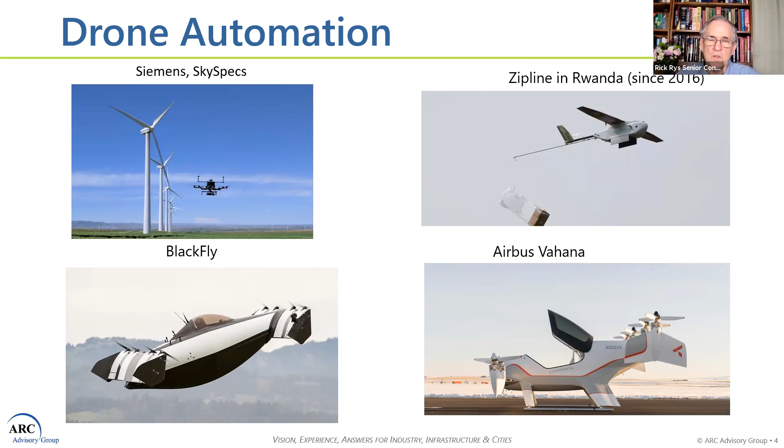But in any event, here's just a few examples of some drones. Siemens has been working with SkySpecs to inspect wind turbines. Some of these other drones are more in line, from Airbus and BlackFly, and you certainly see that the airline industry, Boeing included, have drones coming up. Some of those drones are not just for delivering packages, they're delivering people.

I'm not going to go too long here, but in terms of automation, there's enormous automation in the flight aspects. The engines are automated, the motors and batteries, multiple batteries in series and separate parallel entities, so that any one failure of a motor and battery still keeps the craft able to fly or stay in the air. Obviously there are issues of stability, as in windy conditions.

There's the whole issue of navigation on prearranged plans. The ability to communicate with your drone and what happens with loss of signal is a huge aspect. There's plenty of stuff going on with ADS-B and other communication expertise, so that a drone knows where it is and knows what other drones or aircraft are in the area.

Then there's a whole level of automation software just on mission logistics, data collection, and data management. I'm sure that some of our speakers today are going to talk about all of those problems.

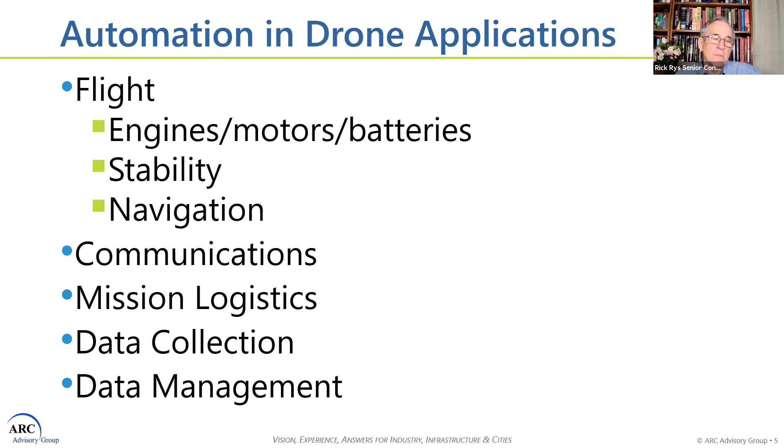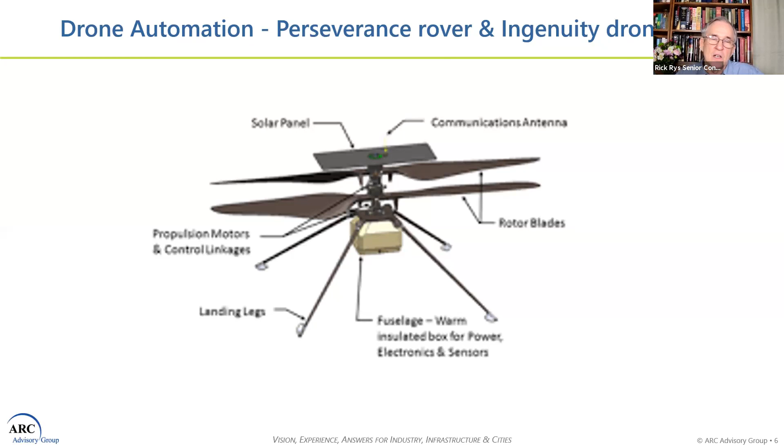I did want to mention that at 3:55 today, just a short while ago, the Perseverance rover mission should have landed on Mars and will deliver this very interesting drone, which will be an experimental drone running in the very thin atmosphere of Mars. If you really wanted to see automation at its best, this is completely autonomous with a 12-minute speed-of-light delay between here and Mars. It's pretty hard to control this with a joystick.

Just very quickly, ARC has covered some of the markets. We did a study a year or so ago on the use of drones in the construction industry. We know that they're very big in agriculture. Utility inspection is a small but growing area. Pipelines, mining, and real estate are also growing areas.

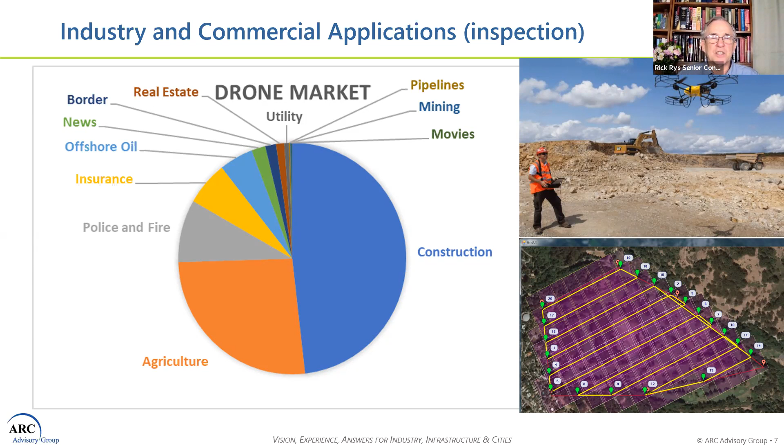And if you compare this to drones for delivery, these markets could become pretty small. Drones for delivery will be a huge thing in the future. Part of that is imagining just how far in the future and how long it will take. But when you look at how fast drones have evolved and changed and found new applications in the last 10 years, just imagine what it's going to be in another 10 or 20 years.

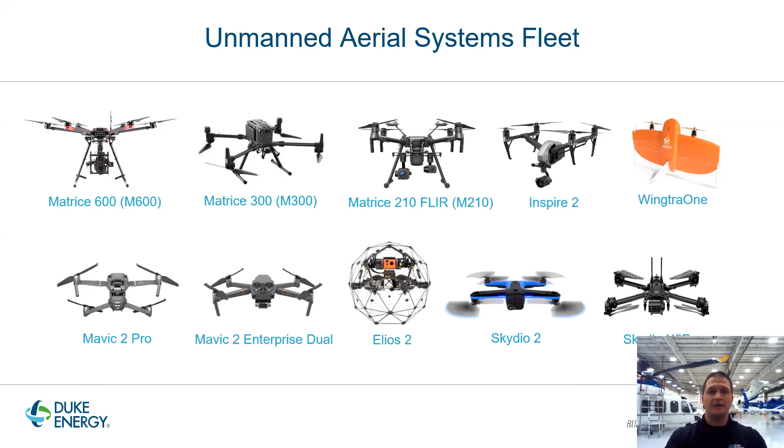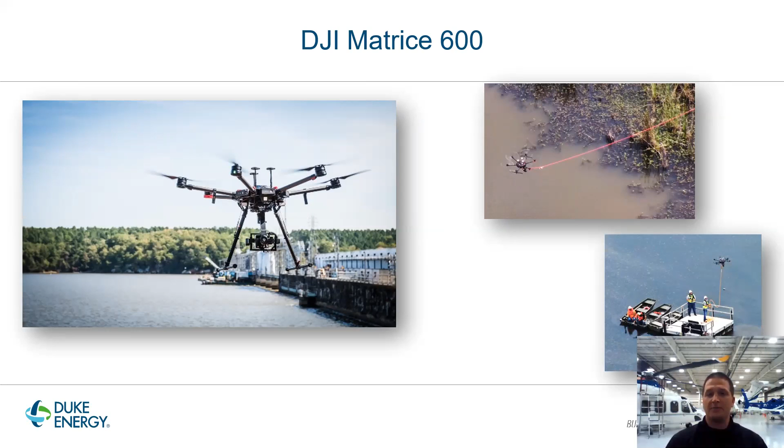Shown on the screen here is the DJI Matrice 600, or M600 for short. It's certainly our heavy lift drone here in our fleet, and we've used it for some pretty unique missions. On the left, you'll see a PhaseOne camera system, which we'll talk about shortly. On the right, you see more of a payload capacity piece of this drone, where we're pulling string across a body of water to support a construction effort. We've also used this drone for water sampling and other various load handling capabilities.

As previously mentioned, the M600 with the PhaseOne 100 megapixel camera is one of our more standard use cases. It's a great sensor setup that allows us the ability to shoot in high resolution while maintaining safe standoff distances conducive to flying a mission safely. In the middle of the screen is a picture of the PhaseOne iXM-100. Recently, we've been using this system to capture imagery that we then turn into a 3D model. What this allows us to do is have an inspector, who otherwise would be in the field climbing scaffolding doing some of the more dangerous inspection work, do this inspection now from the safety of their home.

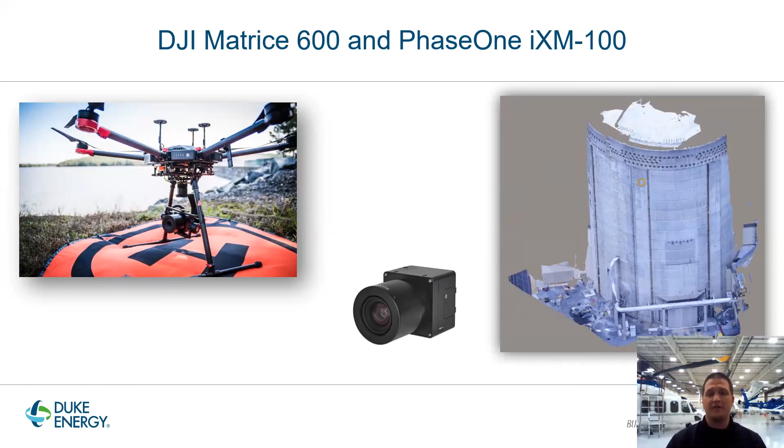Another sensor package that we have for this drone is some new processing that we're trying out - post-processed kinematic, or PPK. We use that system for orthomosaic mapping, and the PPK system is a form of GPS correction that allows for highly accurate positioning to be established in the imagery.

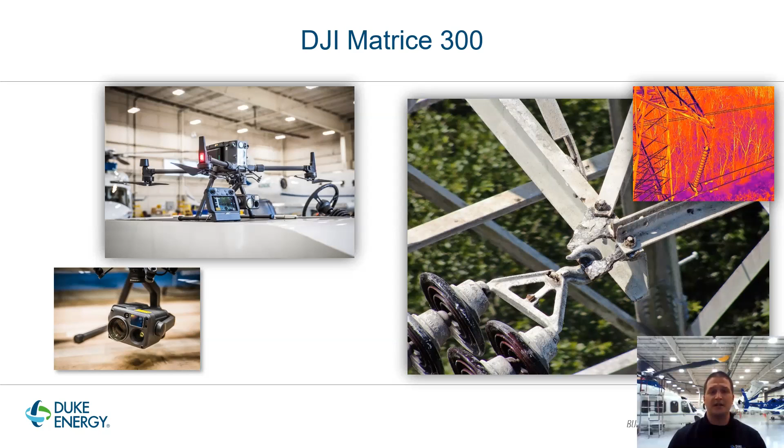It has a very nice sensor package, a 42 megapixel camera, and again, along with that PPK setup, provides a very accurate map. We use it on our solar sites and generating stations, and also on our ash basins, which are anywhere from 200 to 1,000 acres typically, and we're seeing very good success with this drone being able to cover that amount of area.

And then we have our little workhorse here, the Mavic 2 Pro. It's the jack of all trades here at Duke Energy, and for many aviators, you can liken it to the Cessna 150 or 152 of the drone world. It serves as a primary trainer, the drone of choice that we deploy out into the business units for employees who don't fly for a living.

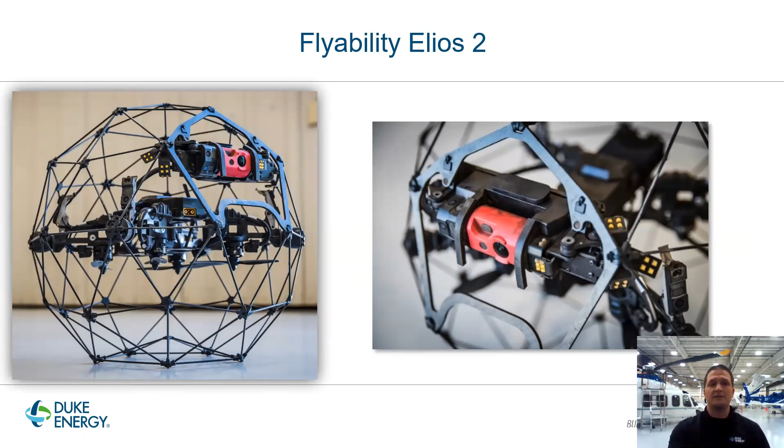EHS being environmental health and safety from a sourcing standpoint, and that goes for sourcing drones, sourcing software that we use for our systems, as well as our vendor network. IT and cybersecurity, obviously a buzzword in the UAS space. Security and risk management, a whole host of departments that are tied to the UAS organization as a whole.

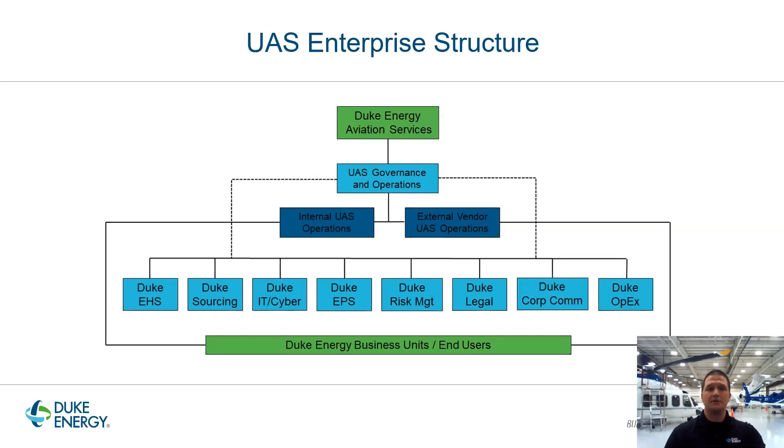From a storage standpoint, we've faced several challenges. A hard drive is the first thing that comes to mind for a transfer to an end user. It's pretty cut and dry, handing over the data physically, but at any scale quickly becomes obsolete.

So we turn to the OneDrive, a Microsoft cloud-based system that we utilize here for the entire enterprise. And after about 6 to 8 months of utilizing the OneDrive for storing data, transferring it to the end user, we ran into some volume issues therein and had to look for a new solution.

Most recently, we've been using a SharePoint site. It's internal to Duke, a SharePoint site that's kind of put a Band-Aid on the solution for now. It's maybe 25 times the size of the OneDrive, but certainly within a year or two's time, we'll be looking for a more permanent solution.

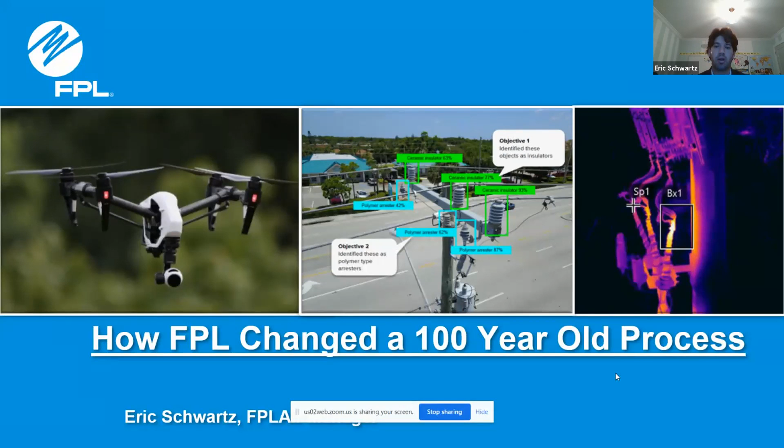Well, thank you guys. As Rick said, my name is Eric Schwartz, and I manage the FPL Air program. Today we're going to talk about how FPL is using drones to change what we call a 100-year-old process. This goes into not just drones, but really diving into the side of Six Sigma quality control and really proving out the business case on how drones are more useful, more accurate, and more precise than a human driving or walking, doing an assessment down a line.

High level, FPL is owned by a parent company called NextEra Energy in Florida. FPL is also part of Gulf Power, which encompasses more than half of the state of Florida. NextEra Energy is our unregulated utility that operates our wind and solar fleet in over 42 states and 5 provinces now in Canada, I believe. On the high level in Florida, we operate in over 35 counties with 9,000 employees and over 75,000 miles of power lines within the state of Florida alone.

To go back to why we're using drones, from an overhead perspective you've got these 5 bullets here: Florida is one of the lightning capitals of the world. You have a subtropic environment—I'll brag, it's 80, 83 degrees today—very hot and humid, and bamboo, palm trees and vegetation grow very quickly. And then you've got hurricanes; this past year we had 5 that made landfall in the state of Florida.

We're also a peninsula, so you have a lot of salt spray that deals with a lot of electrical issues, from lights flickering on and off to faults and failures. And then also the grid—high level infrastructure like Miami and areas that are highly populated and rely on a lot of electricity.

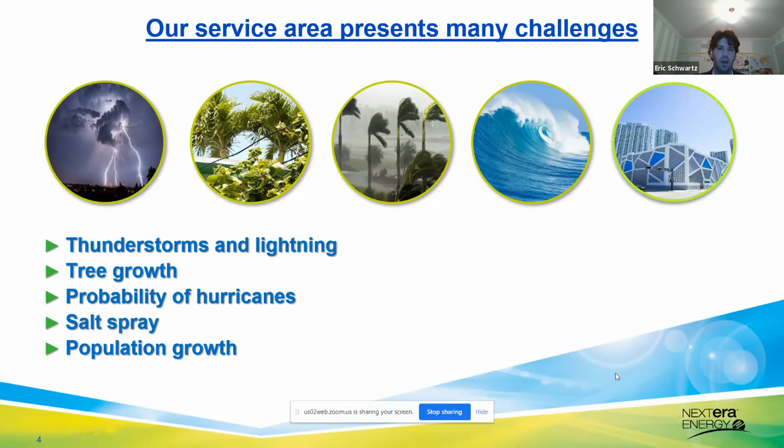So going back to why are we doing this? Why are we using drones, and why are we trying to continue to improve? It comes back to the idea of what we've been doing for the past 100 years. FPL will be 100 years old since 1925, so in 2025 it'll be our 100-year anniversary.

When you look at the assessment, it started out with mules and horse buggy carriages, walking, and now of course walking and driving. And you look at the overhead equipment, it's 35, 55, and some with transmission, 175 feet up in the air. You are really only seeing at least a quarter to half of the actual equipment, because the other half is above you or it's on the other side of the property if you're on a rear of infrastructure and so forth.

On top of it, you're relying on humans and trying to use cameras or binoculars or phones to take pictures of the damage and assessment. So we kind of look at this as the current approach is manual, inefficient, and inconsistent. When you look at this, it comes down to improving visibility, expediting damage analysis, mitigating risk, reduction of cost, and ultimately increase of customer satisfaction.

Our timeline goes back to 2012 when myself and a few coworkers started to use drones as a hobby for Florida Power and Light. It migrated into 2015 with the first 333s for those of you that have been around this long. And then it goes into Part 107, which has really changed the way that companies like ourselves, Duke and FPL and so forth, have been able to really operate at a much leaner and easier business model.

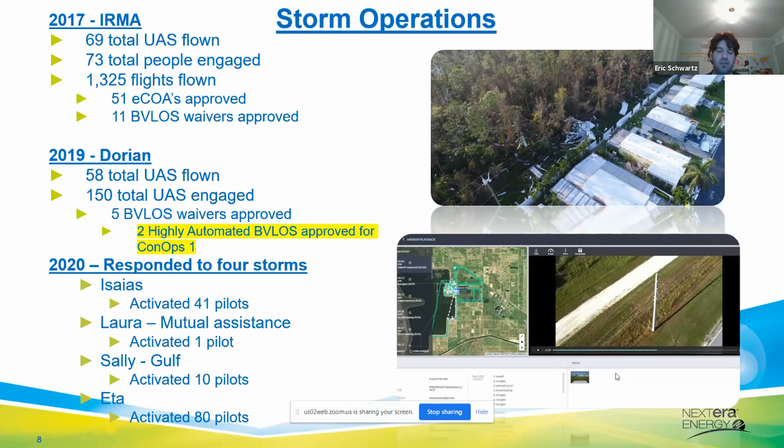Going back to the business case, what we did is we started to get to the level of doing true gauge R&R studies, true statistical analysis to prove out the current state, which was walking, driving, versus a drone. We did these blind studies to where we compared the same exact assessment, the feeder circuit, in the same week, with one group walking and then another company flying.

You could see to where the accuracy or the precision on the drone side was much higher. On the number of level 5 visual findings, the number was 5, and the drone found 4, while the walking patrollers only found 2 of the 5. And while the thermal findings, there were 12, the drone found all 12, while the walking group only found 5.

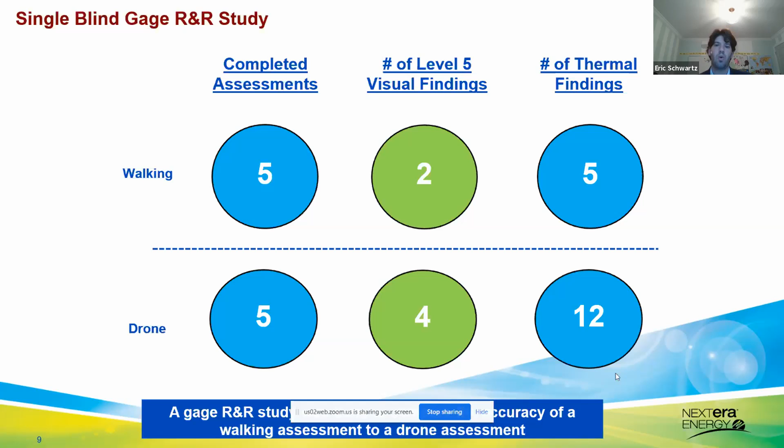And then on top of that, what we've continued to do is take it a little further with artificial intelligence and machine learning. It's always been typical that when a feeder goes out, you assess the entire feeder. But what we've been working on, what we call the intelligent feeder assessment, is a machine learning model using smart sensors in the field, AMI meters, and other devices to predict potentially where the actual fault was, to reduce the miles.

So not only are we able to more precisely find a potential issue with the drone, we are able to do it by having to assess less than half of the previous process. It used to be 100%, now we're just above 50%, and now we're actually down to 25%. This is a little outdated by a year.

But this not only goes into finding the issue and stopping outages. We also, over the past few years, started to see a lot of privacy concerns and complaints from our customers. You can imagine flying this many drones in the air, behind or in front of customers' property and homes—there would be a lot of concerns, and there were. We had incidents where rocks were thrown at our pilots, shotguns pulled, drones shot out of the sky, and a tremendous amount of potential customer incidents we had to deal with.

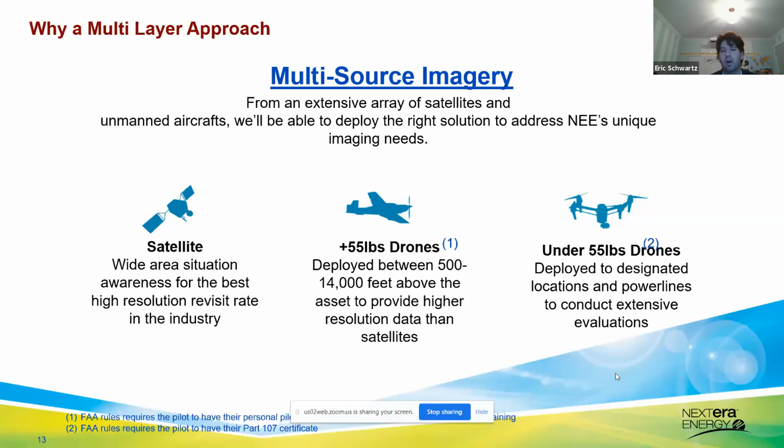But it's not just about drones. Before, the Duke story talked about helicopters and other things. We've really taken a multi-layer approach, using under-55-pound drones, over-55-pound drones, and also satellite imagery. There's a mix in between as well—there are companies now that can do mobile LiDAR, driving around with high resolution cameras and LiDAR to collect imagery from the ground. It truly is a holistic approach, with multiple ways to skin the cat, and as a rate-based utility, we're going to take the best process at the best cost for our customers.

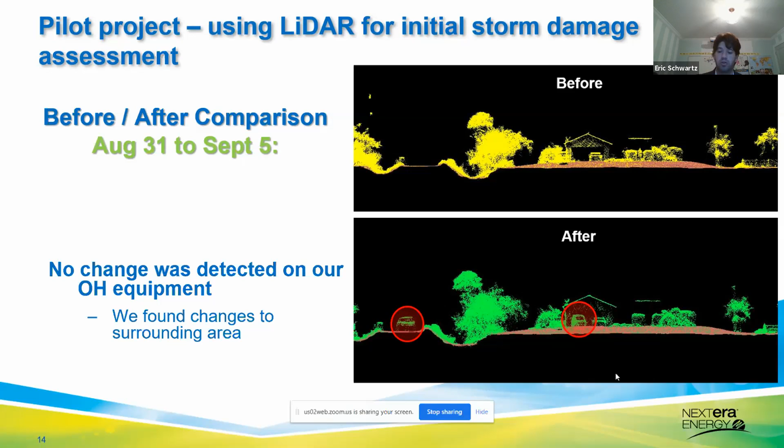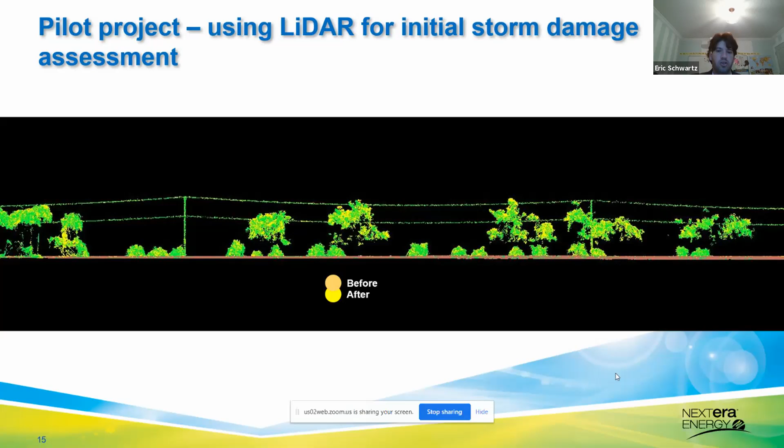And on top of this, we were able to do it within 6 hours. And even though it was only one feeder, about 3 miles long, it still shows where the future holds and the capability of what machine learning and change detection with LiDAR is for storm response and also for blue sky inspections.

This is an overall snapshot of the green and the yellow, before and after, just to show the comparisons of what we were looking at for the storm damage model. And then lastly, image recognition. Drones are a great tool, and also helicopters and planes, but you still have to manually assess every single image. On our under 55-pound drone assessments, we're averaging 1,500 images per circuit.

That's a lot of images that our vendors and internal subject matter experts have to look through to see if there's any issues. So ideally, we've been working on machine learning. In this instance, it's called semantic segmentation, where we're trying to use AI and machine learning to shrink the haystack and find that needle, potentially shrinking 1,500 images down to 50 or 20.

And so this is the true future. Without this, and without machine learning image recognition, it's going to be very difficult to continue to make drones and large-scale drone deployment on our side a true business case for our customers and our company. And that is it on my end, Rick. Thank you.

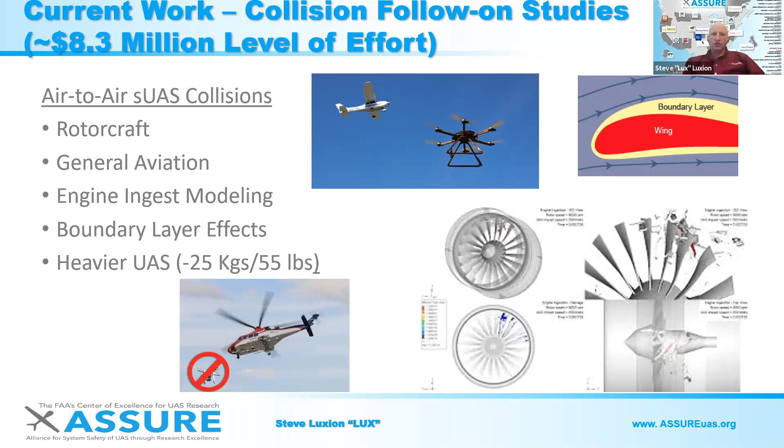We're in the process right now of developing the performance standard for detect and avoid systems. We are validating and verifying with industry what they think the standard should be, and then ultimately the means of compliance to enable you to load your detect and avoid system and be able to operate beyond visual line of sight.

The second project down there, integrated, non-segregated, extended operations, means UAS flying unmanned aircraft, drones flying with manned aircraft. And extended operations means beyond visual line of sight. The National Academy of Science got on the FAA telling them that they are holding back industry, and that the FAA is only considering safety in airspace when lives could be at risk on the ground.

So part of this group's work is for different types of operations, different platforms, different concepts of operations, different airspace, and then ultimately different levels of safety. So for a disaster or emergency response, to get medicine somewhere or to a fire, the level of risk acceptance for the FAA needs to be higher. And we are working through that right now.

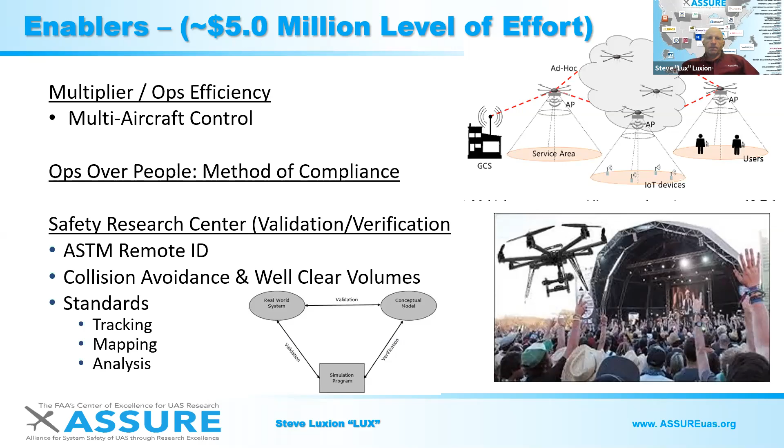Moving into public safety, a big effort is going into what you've heard from Duke Energy and FPL: in an emergency, these things are fantastic where you don't have to risk human life. We've been funded approximately $12 million over 6 years to work out an interagency process from the federal, state, and local levels to better integrate UAS platforms into emergency response.

Everything from how you get the airspace stood up with the FAA, to integration established, safe integration established, and then we'll probably even start venturing into how we get the data flows to the right people at the right time. Right below that, you'll see Assure is working with another partner.

None of this will work, we found out as we were going through it, unless our first responders are trained in all these things that we're developing at the high level. So we're creating an education, training, testing, and credentialing capability.

Congress has funded us through NIST and FEMA to demonstrate how we can build a national program that will give you courseware, training, testing, and then a database of how everybody has done, so that when you have a problem in the future, you're cleared. You can see what these pilots or what this company is capable of. For example, FPL could see how their own pilots are scoring against the national average and decide if that's good enough for them or if they need more training going forward.

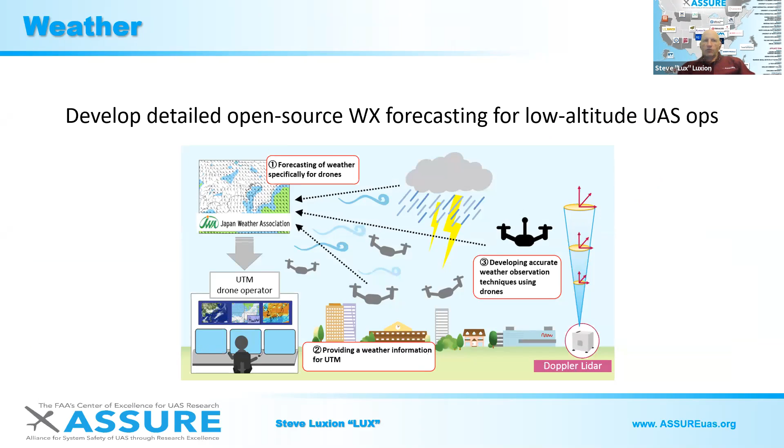And with that, I look forward to your comments and questions for the panel. Thank you.

Wow, thanks, Lux. Very interesting. We're going to have a lot of questions coming in on that, but I want to move right to Miriam. So if Miriam, you could share your screen, we're very interested to see your experience. I think you're going to mention a little bit more about delivery.

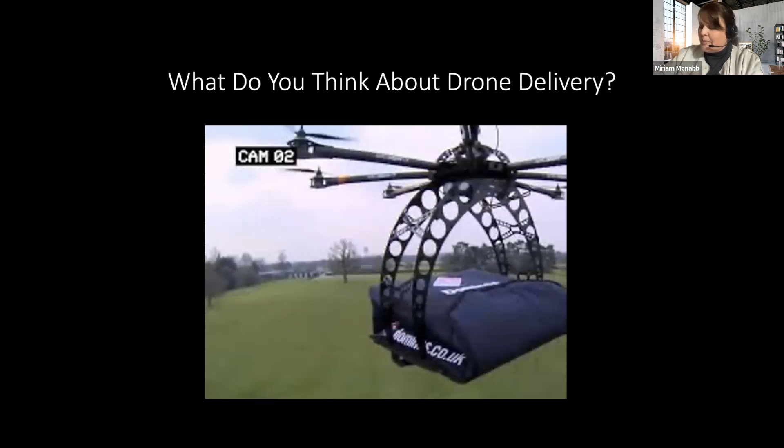This is an image from 2013 when Domino's announced that it would pursue pizza delivery by drone. And since then, we've seen drone delivery of Slurpees and coffee and burritos and more. But here's a problem with fast food delivery in the US today.

A friend of mine in the drone industry in Virginia was asked to participate in the first Chipotle drone delivery test on the campus of Virginia Tech. What happened was that the participants were asked to stand on one edge of the parking lot while the drone operators stood on the other side. A group of representatives from Chipotle stood with the drone operators, loaded up the drones with their burrito payloads, and delivered them, with great applause, to the participants on the other side of the parking lot. Then other Chipotle employees came running across the parking lot with their little credit card machines to collect $9 from each of the observers for their now somewhat cold burrito.

Remember that BVLOS flight, beyond visual line of sight, is not yet legal without a waiver. So you can't actually currently send a burrito from your local Chipotle to your house unless they can see your house from the Chipotle, or they have a very special permission to do that.

Since I haven't made this sound totally appealing, you might be asking why the drone industry is passionately pursuing drone delivery. There are many reasons. Certainly profit is one of them. Retailers, major supply chain distributors like UPS and DHL have a great deal to gain if they can cut costs and time, even by a very small percentage. But there are more deeply significant reasons why drone delivery can represent a major change in distribution networks.

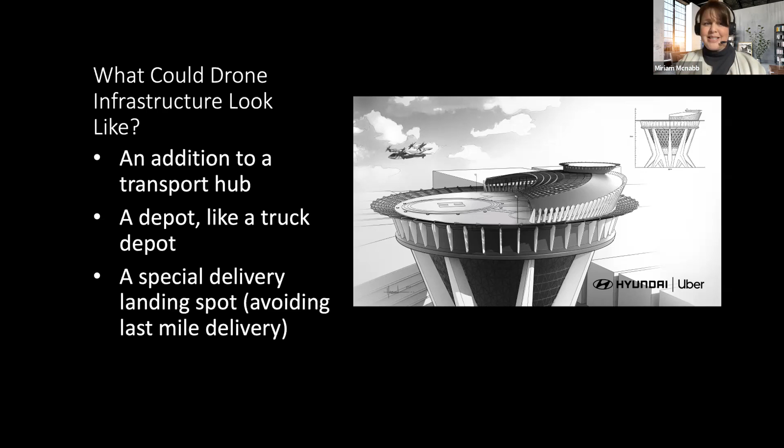We have made some really big progress on all of those challenges. Drone technology has matured. Drones are easier to use. Drones are better at avoiding obstacles. Drones are far more automated than they were back in 2017, when the very first drone delivery projects were taking place. Some regulations are in place.

Flight over people is a really big deal when talking about drone delivery in urban environments. Flight over moving vehicles is also a big deal in urban environments, and the FAA has worked really hard to get those rules out. Data is being gathered and the public is being educated.